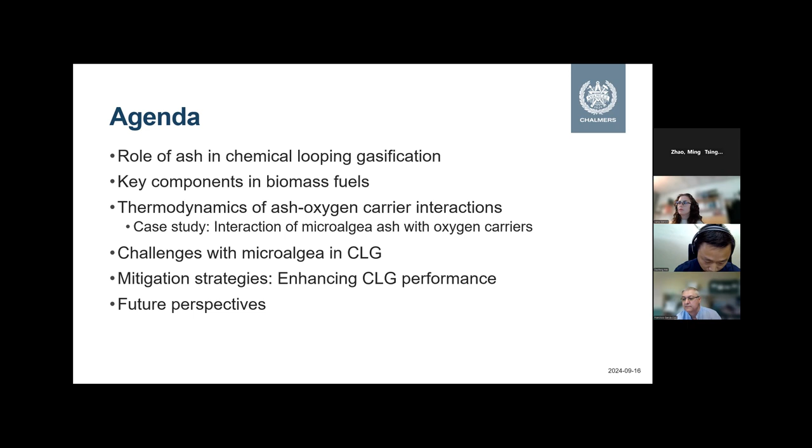So let's start. Why are ash interactions important at all? Because ash doesn't have any calorific value, but it does influence our process efficiencies. And it could, in some worst case, lead to economic losses because it can induce very harsh environments in our boilers. And this is specifically important when we talk about very impure fuels. So I'll go through some of the negative effects that that could have.

One of the major ash-related issues, especially in relation to biomass fuels and waste-derived fuels, are the negative effects that have to do with ash compounds, usually in the form of different alkali silicates, that melt and coat our oxygen carrier particles. And when this melt fraction increases, it could capture a lot of these particles and result in agglomeration. And that could be quite negative if it results in defluidization of our bed.

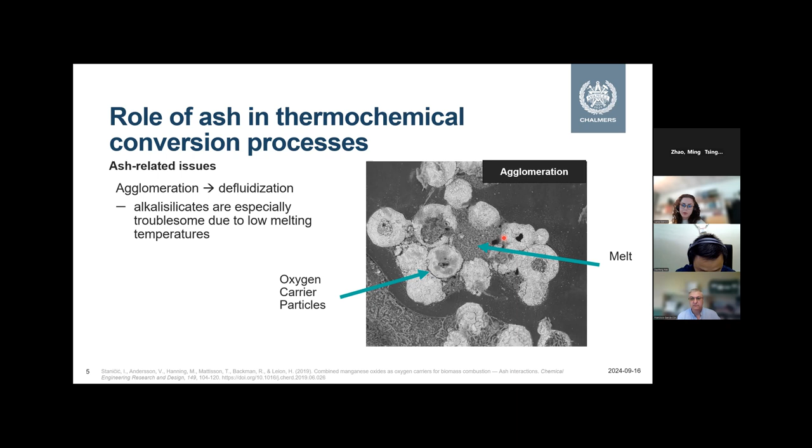So this is from a batch scale experiment where we have observed this, but this has also been observed in industrial settings. So what we see in this picture here is a chunk that has been obtained from combustion of municipal solid waste in fluidized beds, where we have a melt present and a lot of oxygen carrier particles adhered to the surface of this melt. So this is what it could look like.

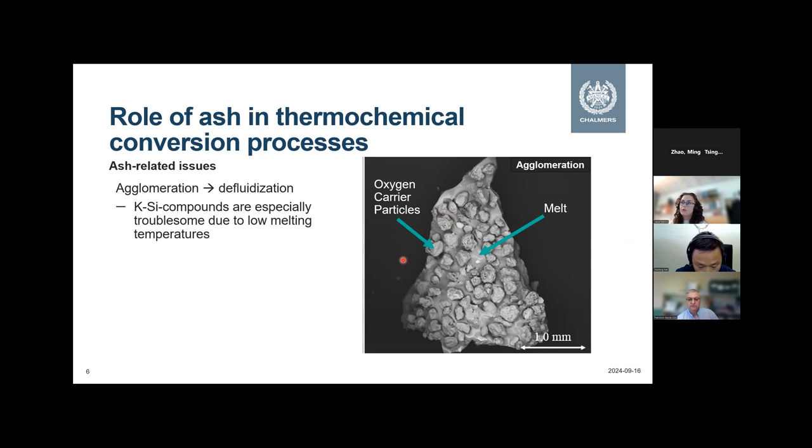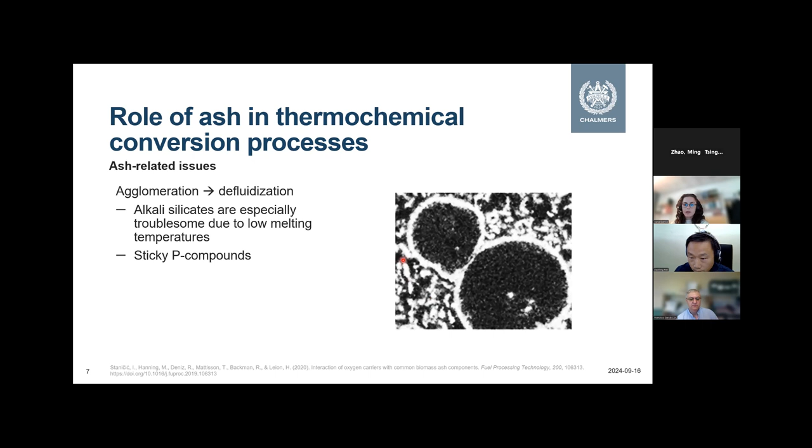Another way for this to happen is also through sticky phosphorus compounds. And here we have also seen that we can have oxygen carrier particles, as shown here in these two round spots, being coated with a phosphorus containing layer. So this is another way to induce agglomeration.

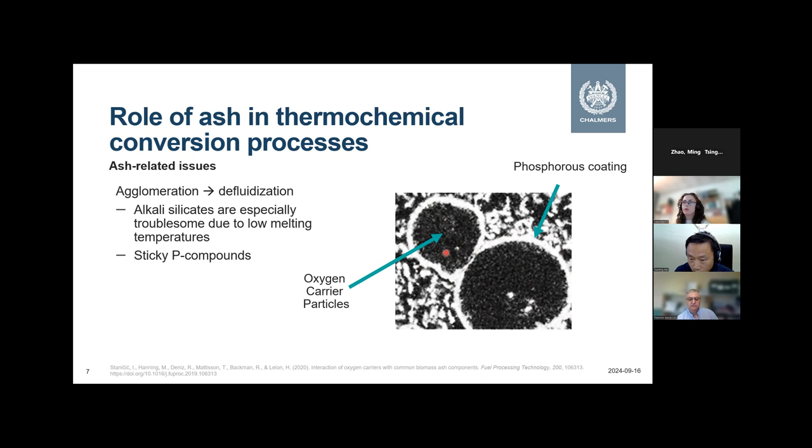The second impact that ash can have is fouling and corrosion. So we can have ash present in our gas, which can condense directly onto cold heat exchanger surfaces and cause a melt, or it can nucleate and then condense upon impaction. And this is especially a problem in waste to energy plants because we have very harsh environments.

Because we can have a mixture of both alkali and metal chlorides in our gas. And this mixture is especially troublesome because it has very low melting temperatures and could, when it's deposited on our heat exchanger surfaces, increase the corrosion rate. And it could lead to some operational issues that can be quite expensive to deal with.

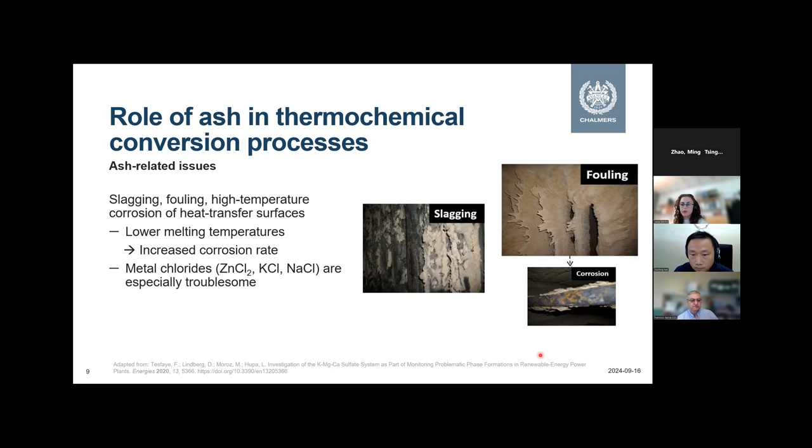But let's not only talk about the negative effects that we have here. We should also acknowledge some of the positive influences that ash components can have on the process. So one of the more common ash components, such as calcium, that's usually present in our fuels, can act as a catalyst for gasification reactions and improve the yield. So there is that aspect as well.

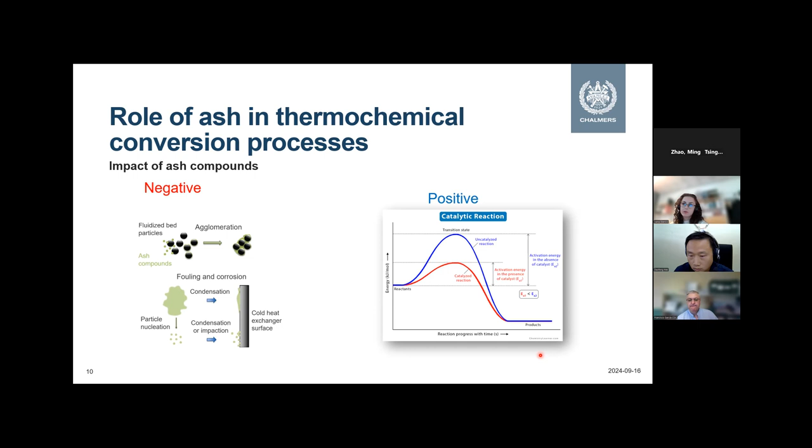And how can we influence our process? There are several factors that come into play here, and usually they are a combination of both physical and chemical factors. So we have the fuel characteristics: size, shape, and composition. We have the operational mode, whether we are combusting, gasifying, or pyrolyzing our fuel. And then also, of course, the temperature and pressure.

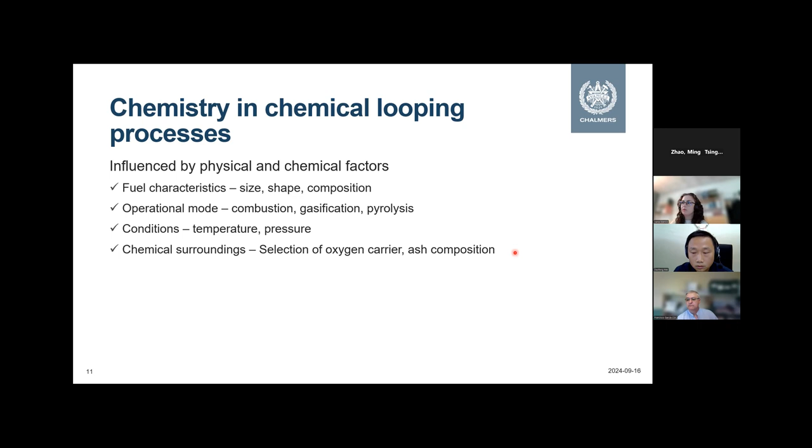One thing that we can affect a lot is the selection of an oxygen carrier, which sets the chemical surroundings in our boilers. And here also ash composition is one of those factors that influence a lot. But here in this case, we have gasification of microalgae, which sets the conditions for this specific type of work here. So I will focus more on that.

But first, if we consider this scale, determining the complexity of different fuels, we would have gaseous fuels far to the left. But if we are looking at solid fuels, we do have a lot of experience with wood chips, which I would put here far to the left. And then a step further into complexity, we can find, for example, demolition wood, which contains slightly more type of impurities and other ash components.

And then more to the right on this type of scale, we have waste-derived fuels, which can contain almost the whole periodic system. But today we are focusing on a new type of fuel. So how does microalgae come into play here? And how can we use our previous experience to see what would happen and what we can expect in our type of boilers?

So here I've listed the key components in these biomass fuels. We have wood chips, demolition wood, and municipal solid waste. So we have the volatiles, the fixed carbon, moisture, and ash. So here we can see when we add the microalgae, how it relates to the other type of fuels. We see we have slightly more moisture being present. This can have some impact on performance and decrease the efficiency, as we have to have slightly higher energy consumption for drying.

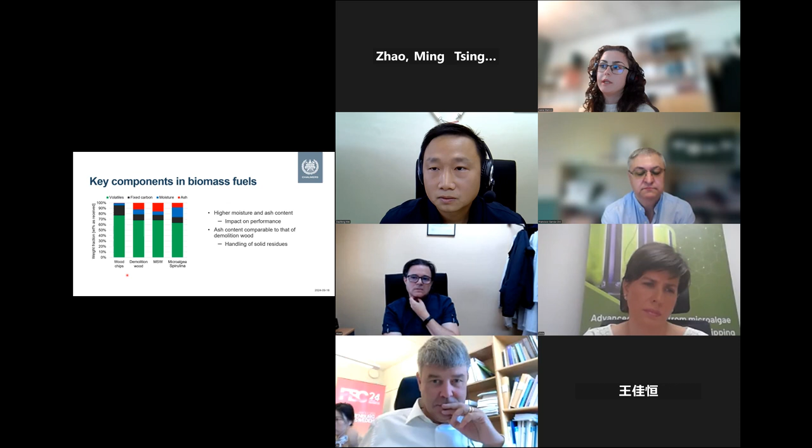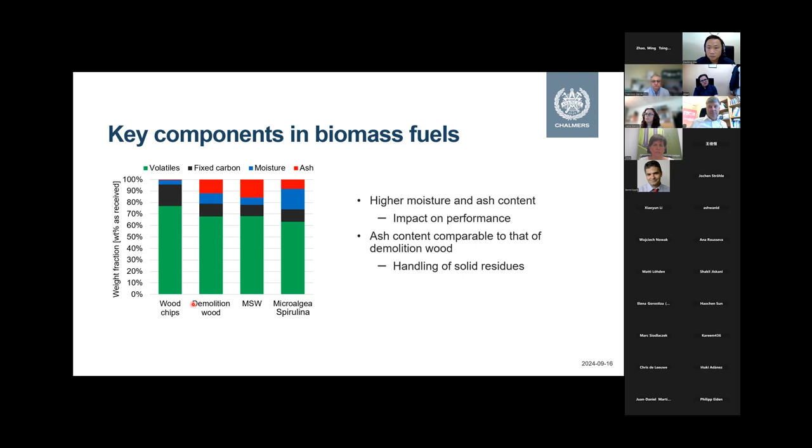We also have slightly lower fixed carbon compared to other fuels. But then if we look at the ash content, it's comparable to that of demolition wood. It's slightly lower than demolition wood, but higher than wood chips. So I would put the fuel somewhere in between here in the complexity scale. But this means that we would likely need some handling of these solid residues after the process. So let's take a look at what this ash actually contains and how that relates to these other type of biomass fuels.

So here I'm showing the ash composition for these different type of fuels. We have calcium, potassium, and silicon dioxide being the more common components. The fraction here where I didn't put anything is other type of components present. And if we take a look at microalgae, we see a slightly different composition. We have more sodium oxides compared to the other fuels. We have quite a lot of potassium and phosphorus as well, but much less silicon and calcium.

So as you may remember, in the first slides when I talked about different types of problems we could have, both alkali metals and phosphorus were shown to maybe cause problems and coat our particles. So would this be a problem? Not necessarily. There are some benefits with having this type of composition as well, because we have quite low silicon content, meaning that we have a lower risk for forming these sticky compounds. And also alkalis on oxygen carrier surfaces could have a positive effect with respect to gasification.

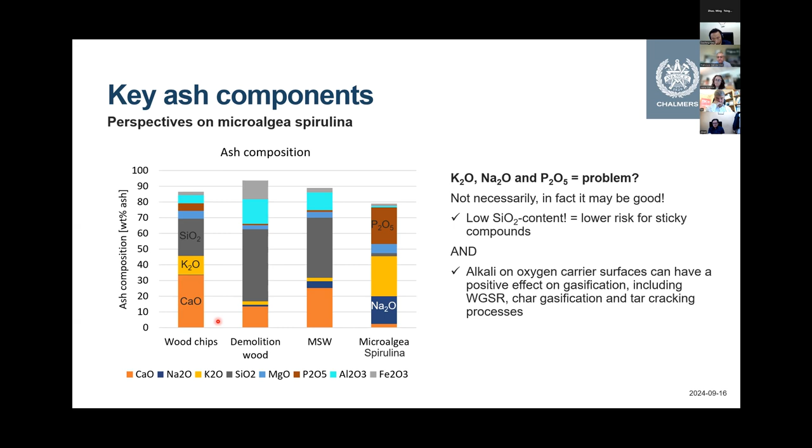But how could these components interact with our oxygen carrier then? So I made a quick study of this to look at possible interaction pathways for different components and their influence on operation, based on experience from other fuels and other oxygen carrier ash interactions. Here I will focus on potassium, sodium, and phosphorus, and I have been studying these type of elements under gasification conditions at around 800 degrees.

So looking at potassium, probably we would find some potassium hydroxides and minor amounts of chlorides in the gas phase. Due to the high concentration of phosphorus, we probably would have some potassium phosphates as a solid. And looking at the experiences that we have, the interactions with oxygen carriers could lead to potassium iron oxides, potassium titanates, and potassium silicates. And I put others here because there are probably some other compounds that we haven't investigated, or different type of oxygen carriers that I haven't been focusing on here.

Looking at sodium, a similar thing can be observed here. Hydroxides, chlorides in the gas, and then some phosphates in the solid phase. Here, it's possible that we form some sodium iron oxides and sodium silicates through interaction with oxygen carriers.

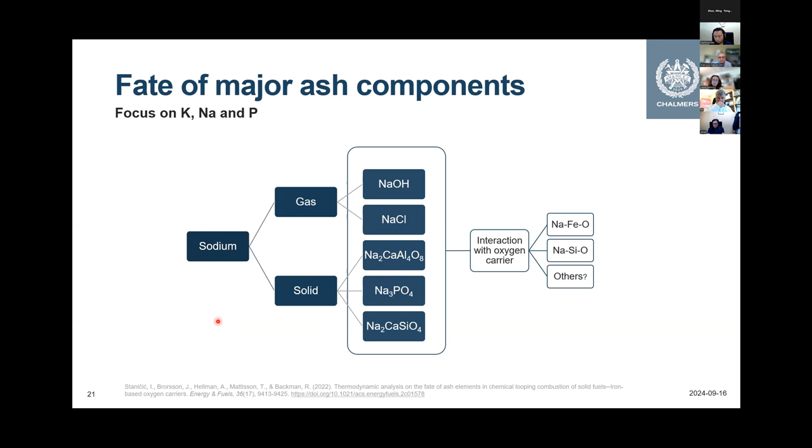And lastly, we have the phosphorus being present as alkali phosphates. And here, there are also possibilities for forming calcium phosphates as a result of interaction, which could cause the surface coating that we have observed in batch scale experiments previously.

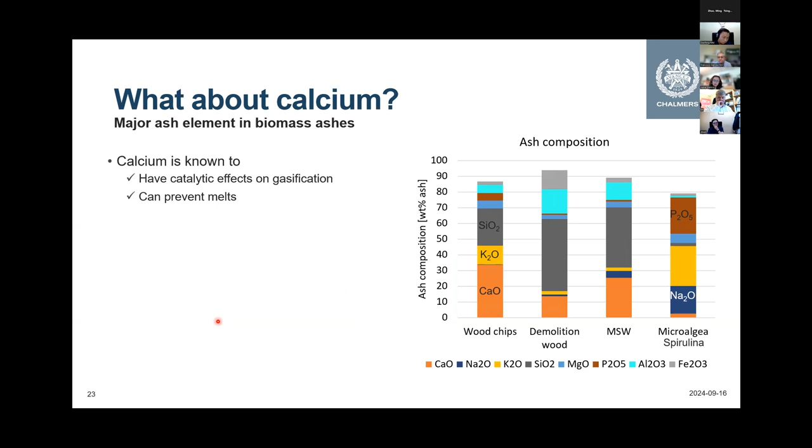But what about calcium? Because it's usually one of the major elements in biomass ashes, and as has been pointed out in the previous presentations, it can have some catalytic effects. It could also prevent melts in our process. It could potentially interact with phosphorus also to form non-sticky compounds, but these could also coat the oxygen carrier particles. But we see that we have low levels in microalgae ashes.

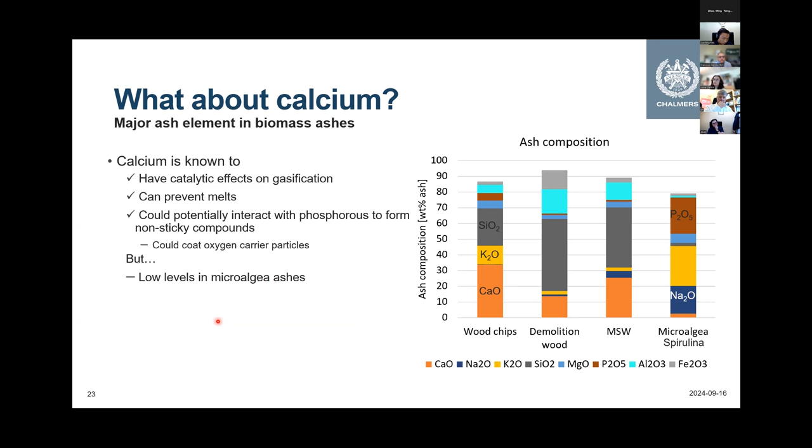So what could we do then? We could co-gasify it with other biomass fuels or use additives. We can look at different operating temperatures or pre-treatment of fuels, but we can also select an appropriate oxygen carrier, which is probably the easiest pathway to go.

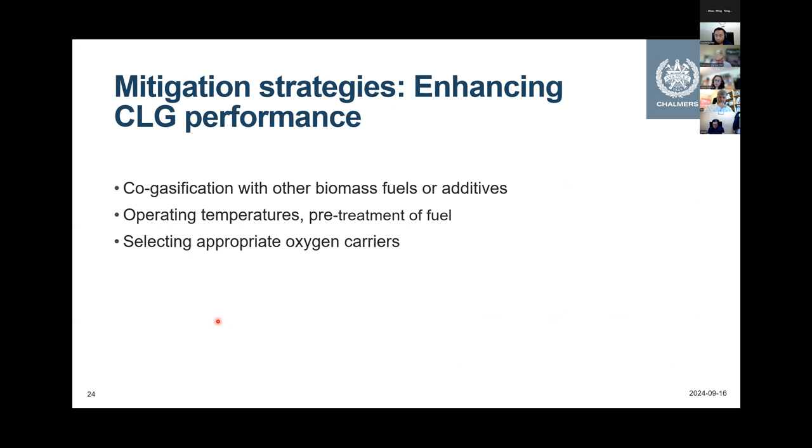So oxygen carriers in chemical looping gasification usually have limited oxygen transfer capability, but the oxygen is most commonly transferred using iron as the main component. And then there are many different types of oxygen carriers that can be used. One of the more investigated ones are the mineral ores. They usually contain iron and then some other type of components, titanium, for example, and then smaller amounts of calcium and manganese.

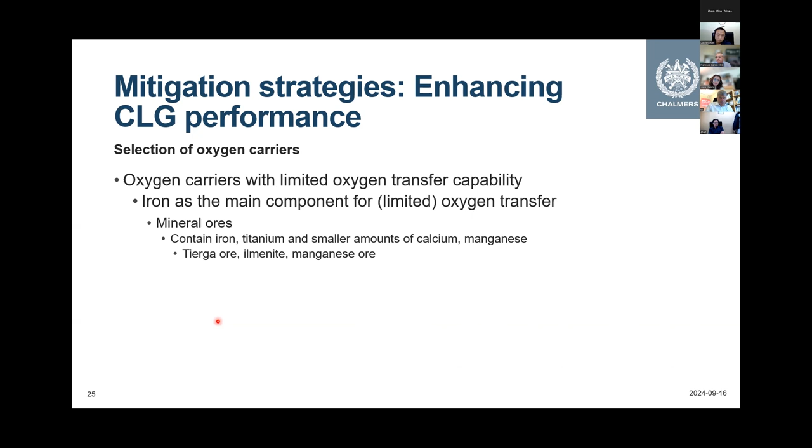Here we have some examples on ilmenite, Tierga ore, and manganese ore that Daofeng also talked about. And titanium is good for capturing potassium in these processes. And then we could also have possible reactions with iron and manganese if we select one of these types of mineral ores. But then we also have waste byproducts. And these usually contain a limited amount of iron, but also much more calcium and silicon. And here we have, for example, iron sand and LD slag as examples.

And iron sand is an iron silicate oxide, so it contains quite a lot of silicon, and that can be good also for limiting the release of potassium into the gas. And then LD slag contains quite a lot of calcium as well, so that could be good for capturing phosphorus, reduce melt formation, and possibly also improve gasification conditions.

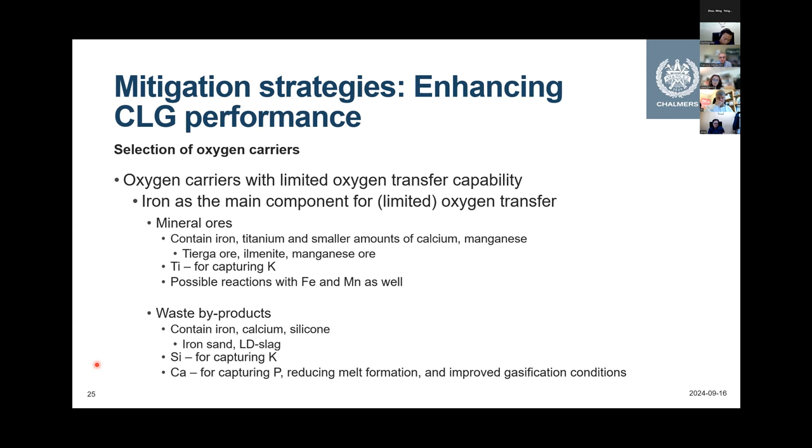Then it could also, I think, be interesting to look into the development of processes that enable recovery of valuable nutrients, such as phosphorus, which is one of the major elements here in microalgae. So I think microalgae holds a potential for third generation production of biofuels in chemical looping gasification. And this is just a part of a larger puzzle. And chemical looping technologies can actually help us to reach the climate goals and reduce emissions.

And the role of microalgae chemical looping gasification could contribute to a more circular economy by providing sustainable fuels. And by understanding the complexity of these technologies and exploring new pathways for biofuel production, we are one step closer to achieving a more sustainable fuel.